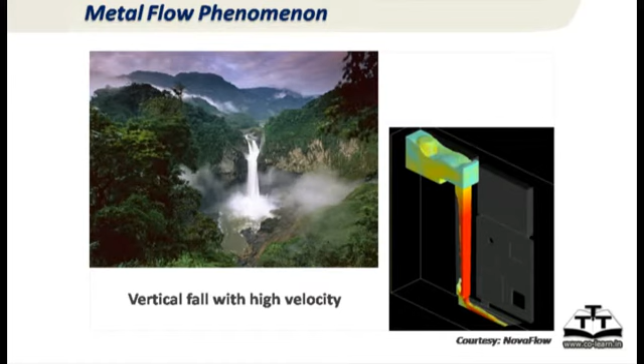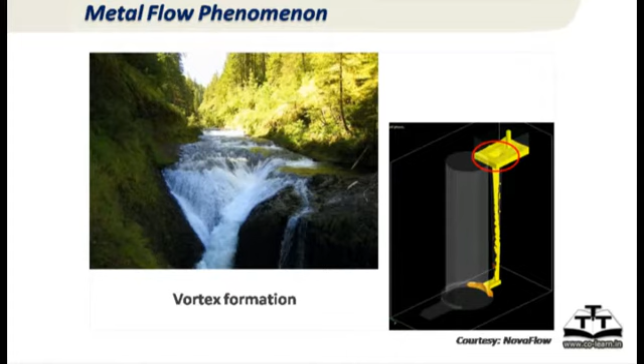Then you have these streams turning around and creating a vortex in nature. You do see a vortex also as metal enters the sprue and starts twirling. You start seeing those vortices, and remember they are dangerous because they suck in clay, air, and even small stones in nature. In this case it will suck in air, slag, and sand particles.

The third is splashing against the walls. You should imagine a seashore and see how the water hits against the rocks in a sea. A similar kind of thing happens when metal smashes against the walls of a mold.

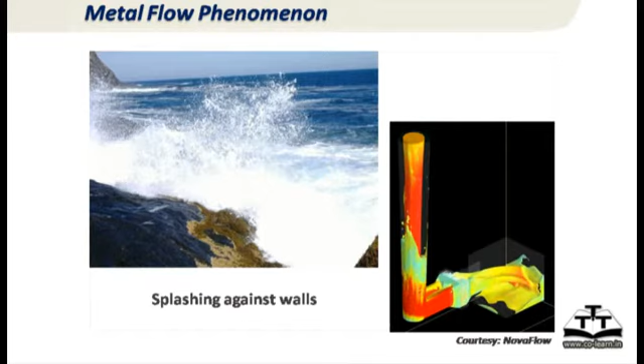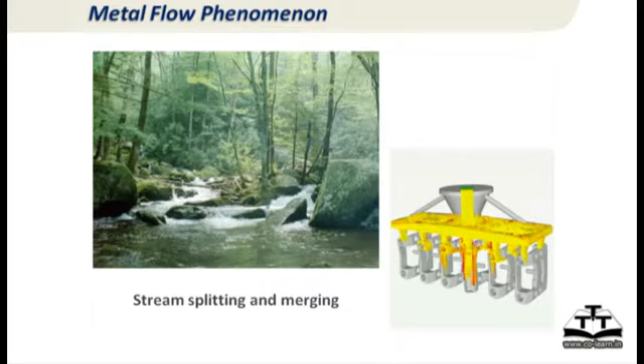The last phenomenon is streams separate and then come together and meet. So splitting and merging of streams happens in nature, and it happens in a mold also, except that in nature you are able to see all those things. Inside the mold we don't know what is going on, we can only imagine, because both sand mold and metal mold are not transparent.

As it happens, the mold filling is the shortest event in the entire life cycle of a casting. You take days to prepare the tooling, then hours to prepare the molds, and eventually you machine for several hours, and finally the life cycle of a part may be 10 years. In the entire life of a casting, the shortest event but the most important event is the filling of the mold cavity. It's a transient phenomenon.

Transient is a word used in mechanical engineering to denote events where there is a continuous change in several parameters. Here pressure is changing, velocity is changing, temperatures are changing. What else is happening? We just looked at metal falling, vortex forming, splashing happening, turbulence takes place, the mold can get eroded, and air can get aspirated and mixed with the melt.

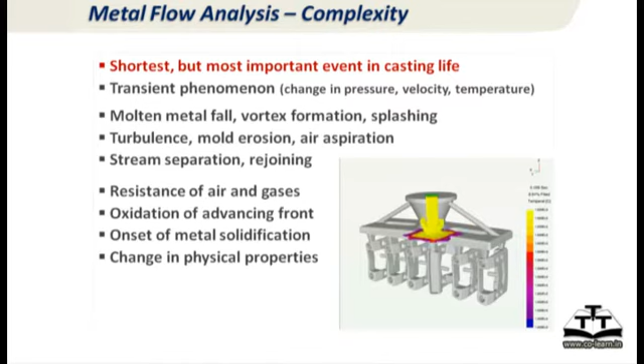Then streams are separating and rejoining. The air and the gases in the mold are resisting the flow of metal progressing in the mold cavity. Then the advancing front is oxidizing, and solidification starts. Even before the mold fills completely, solidification starts, and the properties are changing all the time.

It's so complicated that, as I mentioned earlier, we say metal casting is rocket science for rocket scientists. We say something is difficult, we say it's rocket science — this is rocket science for rocket scientists. People have given up trying to do research in metal casting because it's simply too difficult to understand.

Research is happening in every field except metal casting, at least fundamental understanding of it. A few people are working, as I mentioned in the morning, some gurus, but it's a very handful. In India it's very difficult to find people who want to continue research in this area.

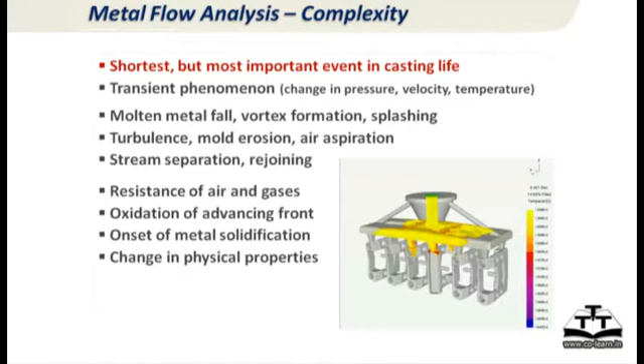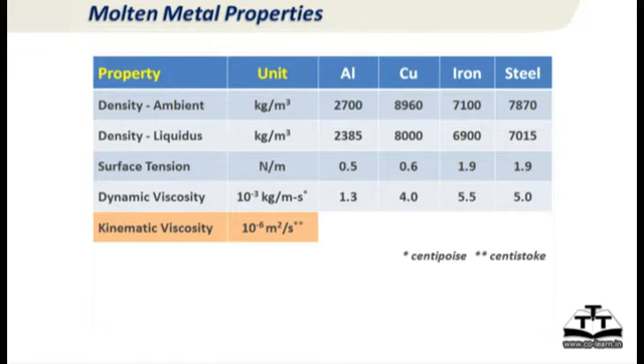Let me give you a hint. Kinematic viscosity of water is 1 centistoke, in fact that's the definition of viscosity, water at room temperature. Diesel oil is 10 centistokes, honey about 100 centistokes, glycerin around 1000-1200, and coal tar 10,000.

On this scale, where do you think the kinematic viscosity of molten metal falls? I want some guesses here. Between diesel and honey? Any more guesses? Which is next, close to coal tar? Between honey and glycerin? You're just waiting to hear what it actually is.

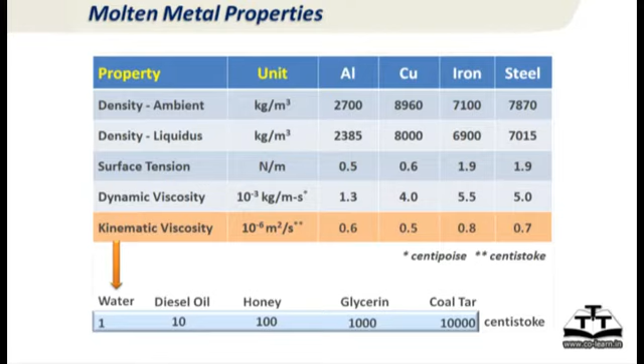How do you calculate kinematic viscosity? If anyone knows the equation: dynamic viscosity divided by density, that is kinematic viscosity. Surprise, surprise, it is even less viscous than water. Molten metal at pouring temperature is of the same order as water. So it's not too difficult to imagine molten metal flowing in a mold, just imagine water flowing in a mold. That's the beauty of analysis like this.

Now let's start looking at pressure. We know pressure is rho GH, that's a high school formula everyone should remember. We also know atmospheric pressure at the Earth's surface equals 100 kilopascals, and rho GH is in Pascals. Rho, density, is in kg per meter cube, G is 9.8 or we can just take it as 10 meters per second square, and head is in meters.

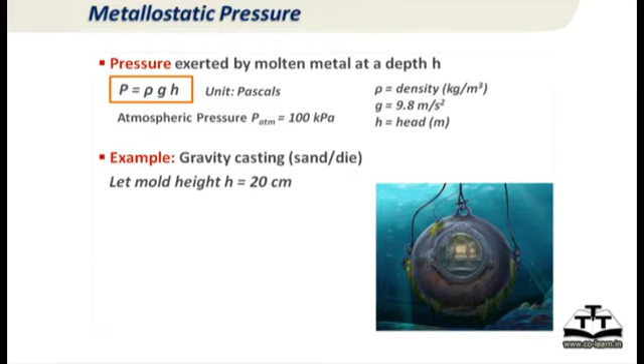Now, what do you think is the pressure exerted by a column of only 20 centimeters of, say, steel? Is it more than atmospheric pressure, less, or what fraction? It takes time to calculate, so let me give the answer: it's about 5 for aluminum and 15 for steel, in kilopascals. Compared to atmospheric pressure, which is 100, this is just a fraction of that.

But remember, atmospheric pressure acts on the metal also. So the pressure at the bottom of the mold is 100 plus, say, 15 for steel. Atmospheric pressure acts on top also, so you're looking at only the differential pressure, which is what drives the metal into the mold cavity. We have to convert this 15 kilopascals into velocity, which leads into the mold cavity. Now, as a comparison, in pressure die casting, pressures can be as high as 50 to 150 megapascals. So qualitatively, sand casting and pressure die casting differ in that pressure die casting pressures are several orders of magnitude, 100,000 times higher, and that creates different kinds of problems.

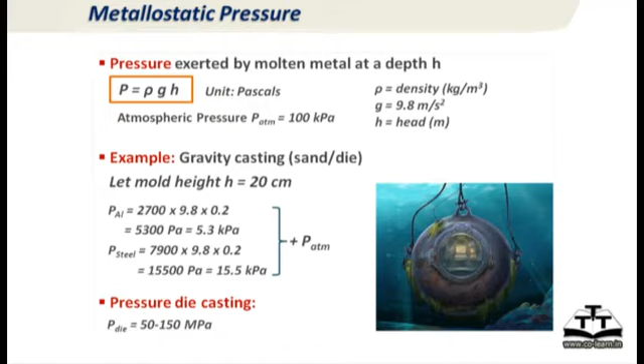So that is about pressure. Now from pressure we can convert into velocity, because the potential energy of pressure converts into kinetic energy of the flow. Using the basic mgh equals half mv square, you get the velocity equation, which is root over 2gh. Taking the same example of 20 centimeter mold height, the velocity at the bottom will be approximately 2 meters per second. Typical velocities in most molds are of this order, a few meters per second, 1, 2, 3. Compared to pressure die casting, velocities there can be as high as 20 to 50 meters per second, 10 to 50 times higher than sand casting.

And velocity doesn't increase directly with height. If you plot that equation as a graph, you see that as head increases, velocity increases, but not proportionally, it slows down.

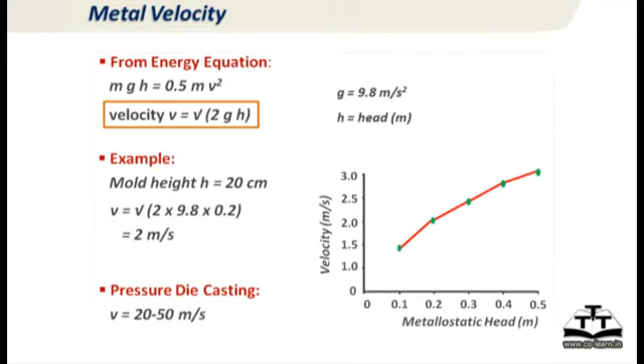Now we talk about flow through a closed channel like a sprue, runner, or gate. When metal flows through a closed channel, the governing equation is mass balance, you cannot create additional mass, so what goes in is what comes out. A1 V1 equals A2 V2 is the fundamental equation.

Let's look at 3 examples. If the pipe cross-sectional area is constant, A1 equals A2, then V2 equals V1 from this equation, clean. If the pipe area reduces, velocity should increase, so V2 becomes more than V1.

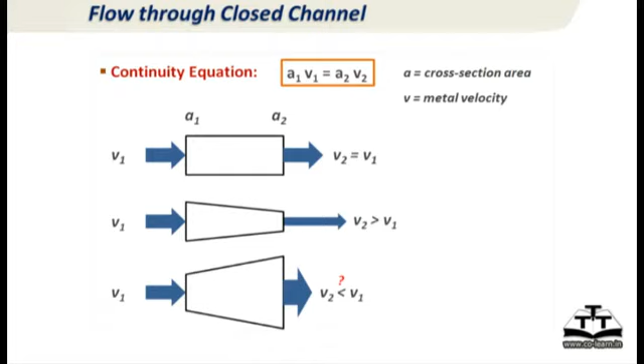Now the third case is where we have a problem. If the area increases, A2 is more than A1, we are supposed to have V2 less than V1. But I am saying there is a question mark there. Does it really happen? Why won't it happen? Any reason? Fundamental laws of physics should be followed, right?

It doesn't happen because the flow starts separating from the mold walls. Flow doesn't follow the walls, it will just come out of the wall. So your V2 may not be less than V1, it may be equal to V1 or less than V1, it could be anything.

On top of that, we are creating an additional problem: when flow separates, the air left in that pocket, actually a vacuum is created, gets sucked into the metal stream and mixes with it. That creates a lot of other hassles, more turbulence, oxidation of the metal, air aspiration, gas porosity, all those things. So flow should not separate from the mold walls, or at least the gating channels. This is one fundamental lesson from here.

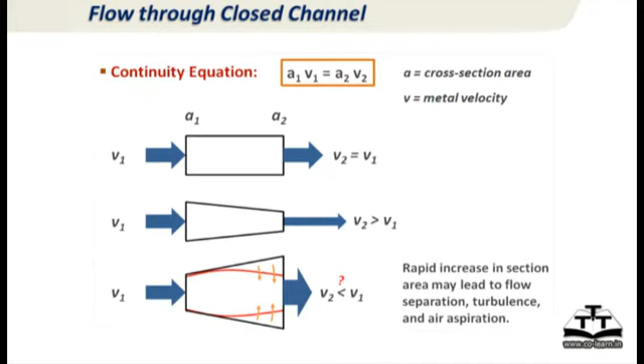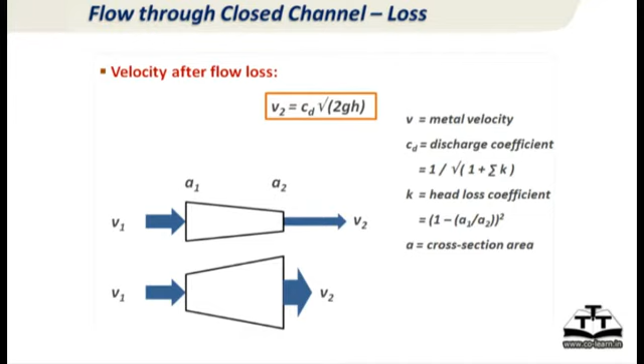So the loss factor is called the discharge coefficient, or CD, and there is a somewhat complicated equation for CD calculation: CD is 1 over root of 1 plus sigma, or the sum of different K values, because the flow may go through several types of features - a bend, a junction, an expansion, a contraction. So you have K values for all those things, and if you take sigma K, then 1 over 1 plus sigma K, that gives you the discharge coefficient. In a way the K is also related to the cross section changes, the A1 to A2 change.

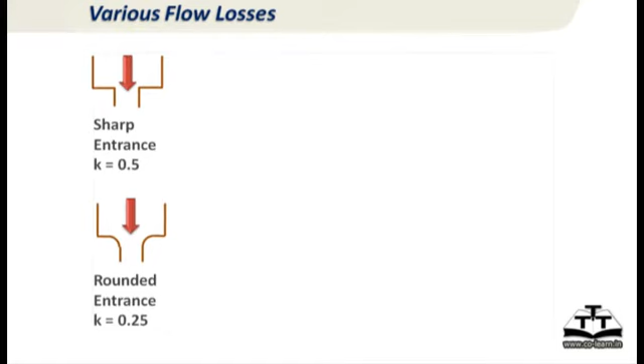No need to worry about this, but let us look at the different kinds of cross section changes here. If you have a sharp entrance, K is 0.5. Remember this K is not the loss factor itself - you have to map the K into CD, which is the actual loss factor. You also have rounded entrance, sharp bend, rounded bend, sudden enlargement, gradual enlargement, sudden contraction, and a T junction. Take the K values from this, map it back to CD, and you get a reasonable value.

I don't have that much time to do all those things, fine. In metal casting, typically you can take values of CD as about 0.6 to 0.8. You're not doing too wrong. But a 20% change is a lot, so if you are really finicky about it, you can use this equation to find exactly how much loss is taking place. This is for flow through the gating channels.

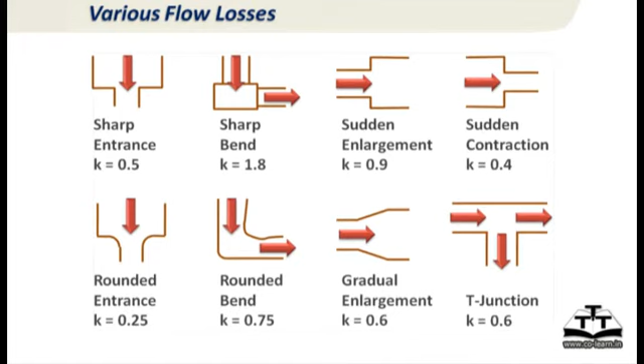Now we come to another interesting observation. You must have seen that if you are gardening and trying to water the plants - let's say you are lazy and want to stand in one place to water something far away - you put a finger on the pipe, a little finger, and it goes a little farther. You put a little more, it goes that much more distance. Then you want to water the wall, and you put your finger almost 99% over the opening, and you find it doesn't go there, in fact it comes back. The velocity actually comes down.

So what is going on here? If I go back to my original equation saying A1 V1 equals A2 V2, I am reducing the area, so velocity should increase, but it doesn't follow that rule either. Are you getting this? Did any of you do gardening?

Can you imagine what is happening? You try to reduce area thinking it will give higher velocity, but it doesn't keep increasing. It goes up for the first few attempts, but then as you increase it more, it doesn't go higher.

Let us go back to our head of 20 centimeters. There are two factors coming into picture: one is the A1V1 A2V2 continuity equation, and second is the discharge coefficient, which is also changing. As you cover more and more area, your discharge coefficient value comes down. Initially my velocity increases from 1.6 to 1.8 meter per second, but as I cover more area, my flow losses increase so much that my velocity starts coming down again. And the discharge keeps coming down all the time because I am covering more and more area.

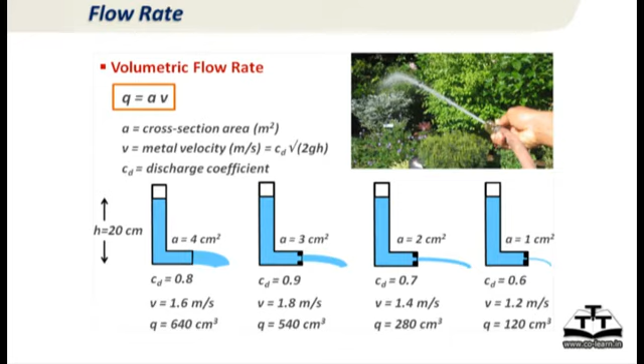So you can learn a lot of metal casting from gardening. That's the lesson here. Now we will go into one more concept, which is choke.

Choke is nothing but the smallest cross section area in any piping system which controls the flow rate. So if you want to control the flow rate in your wash basin, you use the tap. Essentially you are changing the cross section of the flow, not changing anything else. The tank height is same, pipe diameter is same, everything is same. Only the cross section area of the tap is changing. By doing that, I can control how much time it takes to fill up a bucket of water, let's say.

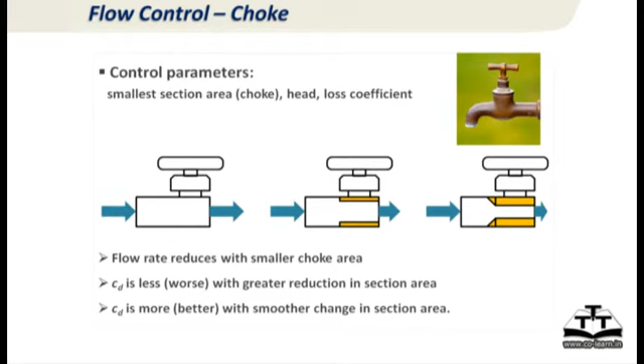That's the same concept here, except you must remember that you have two factors coming into picture: one is area, second is discharge coefficient. So losses and the cross section area. We'll use this knowledge to our benefit when controlling the flow in a gating system.

Now people talk about friction losses. Most of us studied in engineering these long pipes, and civil engineering people talk about friction losses in a pipe and so on. What I want to tell you is that pipe loss is applicable only when talking about long pipes going into hundreds of meters and kilometers. Here we are talking about just a few centimeters, maybe a meter at most. So friction losses really don't come into picture, and you can safely ignore friction losses in metal casting.

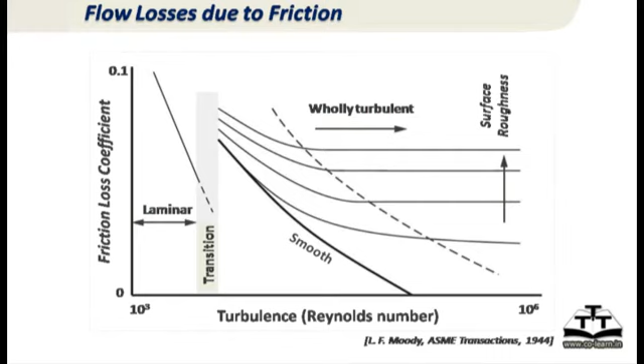We only worry about the losses of contraction, expansion, and so on. Then we have an issue where the flow is no longer through one channel nicely like in civil engineering. The pipe is now splitting into multiple channels, so each gate or each runner from a sprue is a different opening. Now what is the distribution of flow in that? Is it equal?

Supposing I have a junction like this, and the flow is coming from the left side, coming out in one T gate, another T gate, and the last gate which looks like an L gate. Will the flow be the same in all the gates? Will it be more in one of them, assuming area is the same? The last gate will have more flow.

This can be proved only by gardening again. You take the garden pipe, make 3 holes, and find out. You'll find more flow coming out from the last gate, primarily because of inertia. By inertia, flow goes to the last one first, comes out, then it reverts back and comes to the front gate. So between the 3 gates, the L gate flow rate is more than the T gates, because L is always the last gate. You can't have an L gate in the middle - the moment you say L gate, it is the last gate. So L gates will always have more flow rate than the T gates.

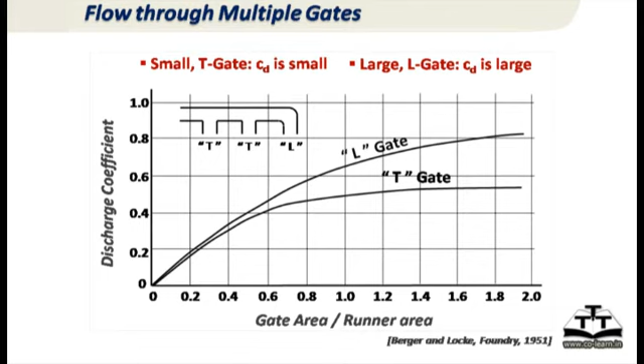Next concept we'll look at is the velocity at the gate exit, which is root over 2gh. That is only the velocity coming out of the gate. Then it follows what we call projectile motion, like a bomb coming out from a warship. So looking at the path of the projectile motion of the metal jet, it is possible to actually estimate where it hits, with what velocity it hits, and with what angle it hits.

And the equations are here. So if you look at the same example we've been following, to calculate the distance and angle, we need to first calculate the time of flight, how long it flies. Time of flight is given by tau - we'll use this symbol for time throughout the course - root over 2h by g, which is about 0.1 second in this case, and the horizontal range is your horizontal velocity into time, which comes to about 20 centimeters in this case.

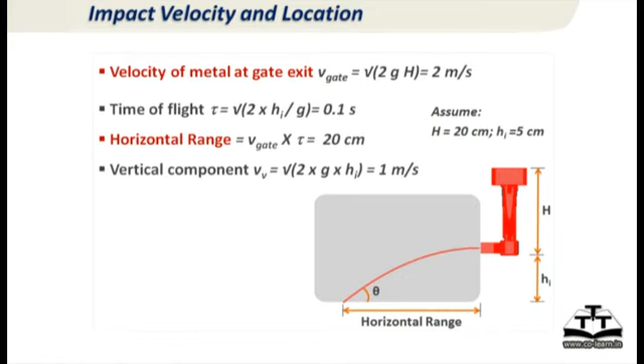The vertical component you can calculate by this equation. Once you have these two components, the actual impact velocity is a vector sum of horizontal and vertical component. You don't have to derive these formulas, you can just use them and get the actual impact velocity. Then you can also calculate the angle, which is tan inverse of v by v gate. Most calculators, even iPhone now has a scientific calculator, so you can just hit tan inverse and calculate that.

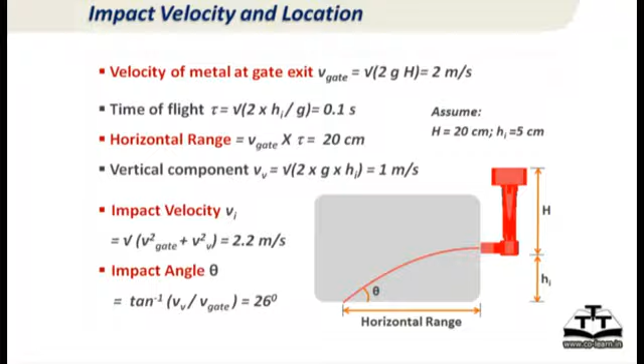So now what is more dangerous - do you want to impact at 90 degrees, or at 0 degrees? Obviously hitting like this is worse because it hits with the full force of the metal. But if you are hitting horizontally, the vertical component is 0, and in fact it is almost harmless, at least in theory.

So whenever you calculate the angle, you can calculate the vertical component and see what is the effective impact velocity of the metal there.

But velocity alone is not enough. Between an aluminum stream and a steel stream, you need to know which is going to create more damage. So you have to bring in momentum, which is mass into velocity. For the same volumetric flow rate, you can use density as a measure of comparing the impact of aluminum and steel. The symbol used for momentum is P, so P is equal to rho into vertical velocity of impact.

In this case, it comes to about 7,000 kg meter per second, and the force of impact we can calculate to finally 0.28 newtons. Then what is the stress?

Now that depends on your stream - is the stream spreading out, or is it focused like a laser beam? Usually it spreads out a little bit, but how much is difficult to estimate. But if you imagine the worst case scenario, where the whole thing is concentrated in the same area as the gate area, not spreading out, it comes to 1.4 Newton per meter square in this case.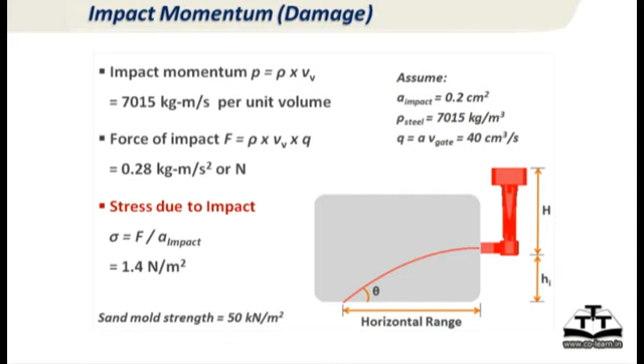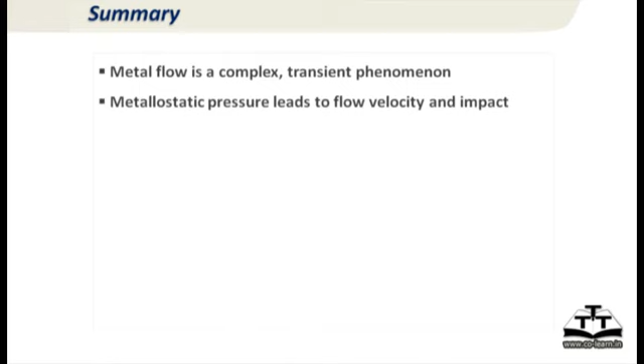So what we have seen is that metal flow is first of all a complicated phenomenon, but we can have some simple measures to understand the flow. We looked at pressure, converting pressure into velocity, velocity flow losses through different channels, continuity equation, and from that we looked at the flow through different kinds of gates - first gate, last gate, and so on.

And finally how the metal stream is going to be impacting into the mold cavity, and we can estimate the effective velocity of impact, momentum of impact, angle of impact. From that we can estimate if any mold is going to have damage. So this is quickly about flow.